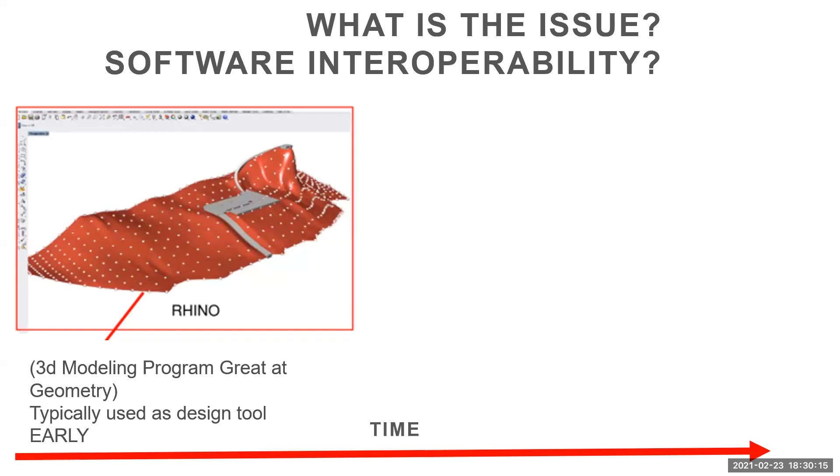Robert, yeah, okay. Angela, I hear you. If you want to shout out, say something, and I'll give you a shout out. Okay, very good. But what's the problem with that?

What do we typically document with? We typically document with Revit, right? Why? Well, it's a great BIM software, good for 3D coordination, good for documentation, right?

But that tends to happen later. So early on, you get these 3D models that you build in Rhinoceros, and later on, you have to be able to document the thing. It's not done in the same software - Rhinoceros is done by McNeel, and Revit is done by Autodesk. So what's the problem? We got to get from one spot to another. I mean, of course you can go back and forth, but that's the problem we're plagued with in our industry.

Does anyone have an issue with this, or has everyone already solved this problem? Let's see if there's any issues. Any headaches? Or has everyone got this solved? Yes? No? No one, not solved. Okay, Jeremy - migraine. Nearly everyone has an issue with it. Okay Bob, very good, so Bob's talking for the whole group.

Awesome, okay, so it's 2021 - why is this still a problem? Okay, I'm just laying the groundwork. We're going somewhere with this, okay everybody?

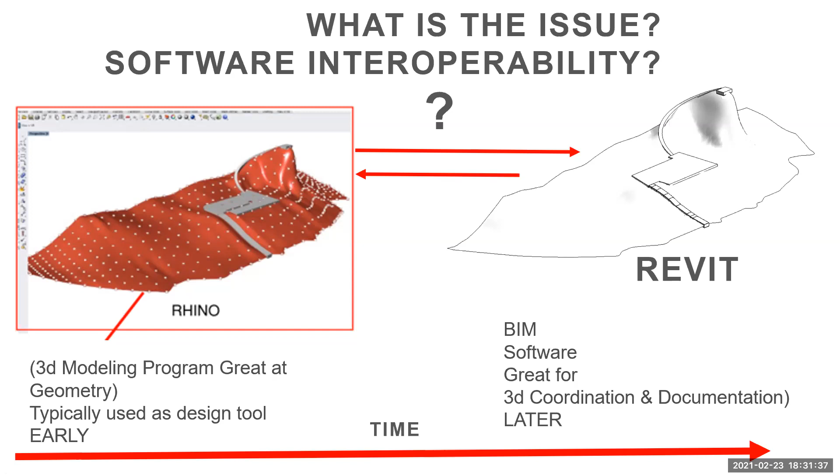All right, so what have we had to do in the past? It's sad, it really is, but this is what happens. We have to sometimes remodel from scratch, because we can't just go into Revit and say add Rhino and everything's perfect. We just don't have that - it's also not done in the same software.

Nate, okay good, there are add-ins - I'll get to that. Those are imports, but does anyone model from scratch? Come on now, I know you're out there. No one? Okay, maybe so. I do, I'll admit it. Okay, what else do you need to do?

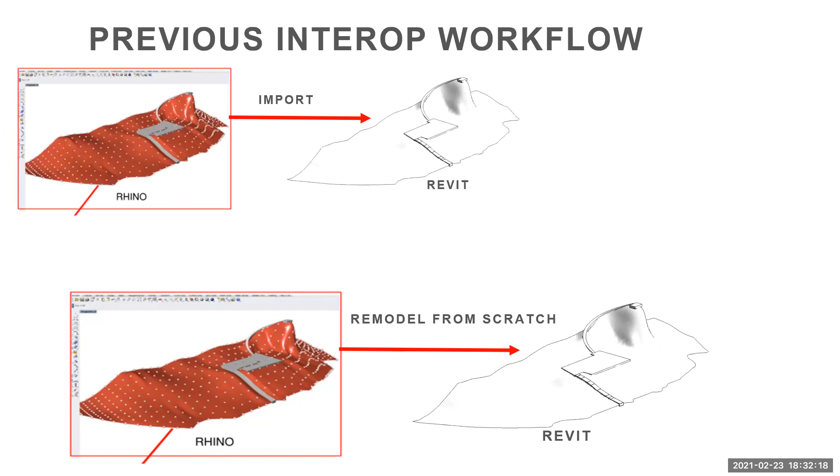Import, I saw CSV, okay that's one - pass it through another maybe database, or DWG import. The problem with this is it becomes unintelligent. Another one is there's add-ins out there that do this, depending on what software you're using - Conveyor by Nate Miller, there's also others, Mantis Shrimp, things like that. But these are all solutions that we're kind of using in our industry that aren't quite as seamless as we would like it.

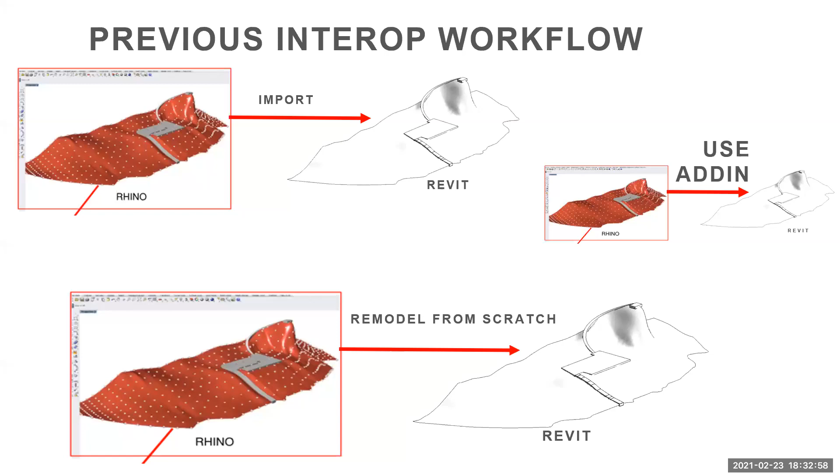So is everyone on board with me so far? These are kind of the issues - I'm just setting up what the problems are here in our industry. Any questions so far? Okay good, we're moving fast. This is awesome. So what do we do?

On board, nice Andre. What do we do? Well, there's a GIF now in our industry - can anyone guess what it is? Here, this is a hint. Someone guessed it earlier, Andre mentioned it too. Come on now, we got to get - this is virtual, but we get everyone involved. Come on now, anyone guess what this is?

Rhino Inside - that's right. This was a rhinoceros that I modeled inside of Revit. It's just, anyway, it's Rhino Inside. Okay, what does that really mean? What does Rhino Inside really mean? There's a lot of talks out there on Rhino Inside - I've probably easily done at least 10 of them over the last year on Rhino Inside.

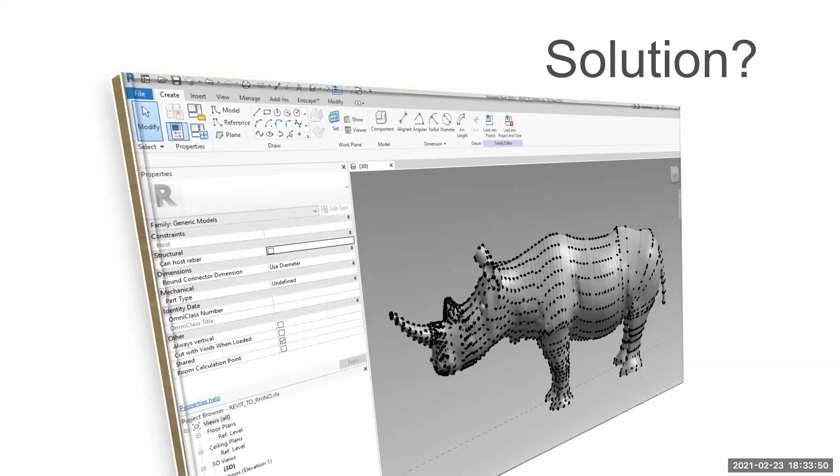We're going to take a slight spin on it, but this is one technology that can help you solve your problems. Why is that? The McNeel folks, the ones who make Rhinoceros - I tend to call Rhino Rhinoceros because when I say Rhino and Revit and keep saying them back and forth, sometimes I start switching them because they're one syllable words with an R. So I'm going to try to call Rhino Rhinoceros just for everyone, so you know.

The McNeel folks said, okay, why don't we do this - why don't we take the entire Rhino program and all of the things that come with it, including Grasshopper, and we'll just shove it inside of Revit. And what does that mean by shove it inside of it? That means we'll actually make it an add-in, okay? So now that's what's happening.

So we have this new tech called Rhino Inside Revit. And it's exactly that—Rhinoceros inside Revit. It is now an add-in, an elaborate add-in, probably one of the most elaborate add-ins I could think of out there. But it's basically an add-in, okay? And what that allows you to do is start to solve some of these interoperability issues.

Don't worry, I'll keep an eye on the time. Andre, we can go till the hour. I get about 30 more minutes or so. Go, keep going. Okay.

Okay, so let's look at this, right? Rhino inside Revit—now we have Rhinoceros and Grasshopper running inside of Revit. So what does that mean? That means now if we have a Rhinoceros model, and we'll bring this one up a little bit later...

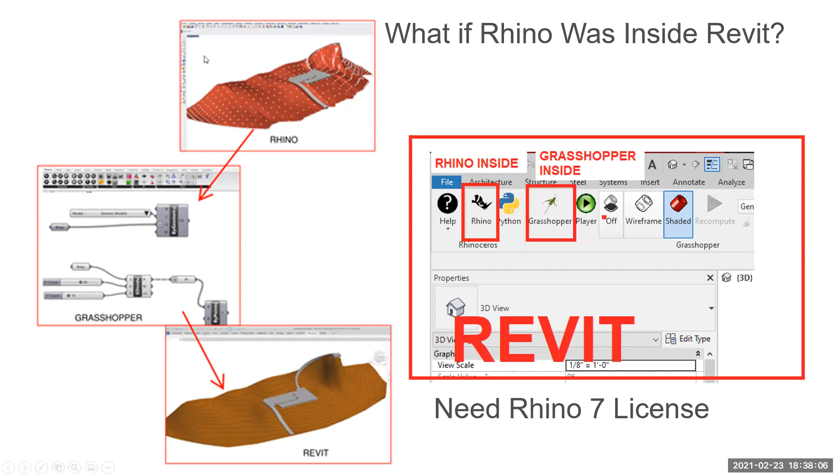Is it always topography that is imported? Good question, Peter. No, it is not always topography. In this example, it's topography with only six components that need to do it, but it could be a floor, a wall, structural framing, columns, or a road, perhaps. So the idea here is meaningful information—that's the point, right? Because before, a lot of times when we were doing imports, they were just meaningless information. If this came in as an SAT, that's only so good, but what if you need to tag it, document it, dimension to it? Meaningful stuff—let's keep thinking about that.

Good question, Peter. All right, so let me tell you also what Rhino Inside Revit is not. Is it the best thing since sliced bread? Yeah, absolutely. But let's just be realistic about it too, okay? So I showed you, this is Grasshopper. If you're not familiar with Grasshopper and you are familiar with Dynamo, it is a visual programming language as well, similar to Dynamo—I'm going to say similar to Dynamo, okay. But let me just show you what Rhino Inside Revit is not, okay?

This is looking inside of the Grasshopper environment. I want to tell everyone what it is not, okay? It takes a little bit of work. You can't just take Rhino geometry and stick it into a component. I called this the Rhino to Revit super component, where all your Revit geometry moves to the correct category, looks absolutely perfect on your Revit sheets, converts your document and your geometry perfectly every time, and then you have no RFIs, no change orders on the project.

This is not true, okay? I just want everyone to understand that. It's an easy button, but you need to make it that way. What I tend to do when I talk about new tech is everyone thinks it's gonna solve all their problems and they're never gonna need to do any work. That's not true, but this is definitely gonna solve your interoperability issues. It just takes a little work.

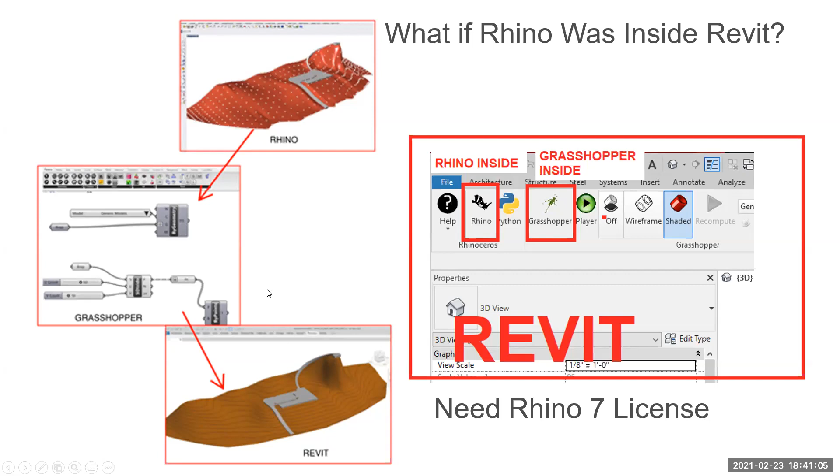Okay, good. All right, so now what? Let me show you—I don't have a lot of time to do live demos, and I normally do that, but let me just show you at least a little bit of something live. I just want to show you that when you use this technology, you need to be critically thinking, and then we'll get into a bunch of other things, including Dynamo.

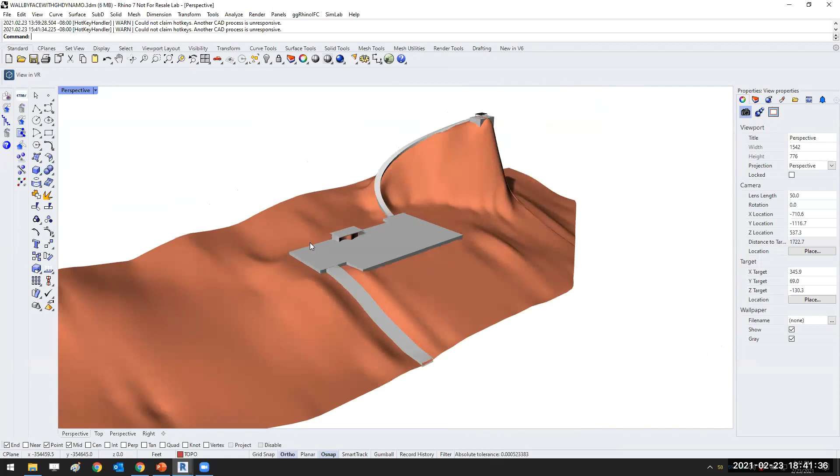Okay, so let's just look here. This is actually the Rhinoceros model that I had open earlier. If you are inside of Revit, there is a new tab here called Rhinoceros, if you have the Rhino Inside Revit plugin, and it gives you access to all this functionality. This one would be for opening the Rhinoceros model, and this one gives you access to Grasshopper. Now, I have Rhinoceros open right now—this is called Rhinoceros Inside, meaning it's open as an add-in through Revit.

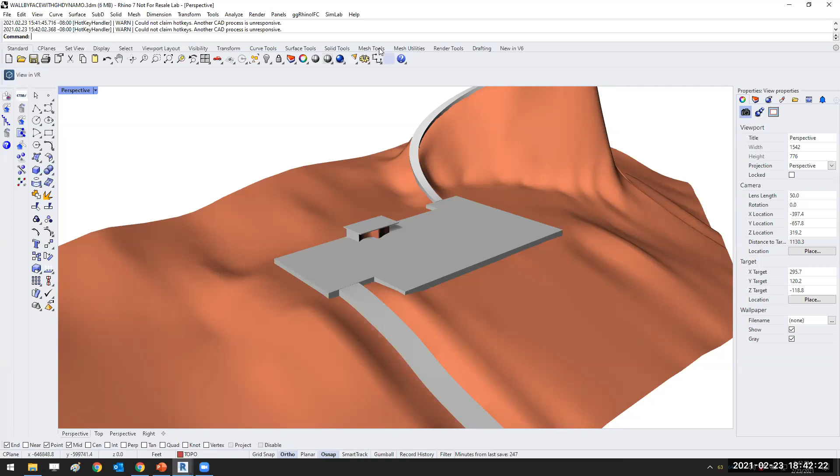If you can see my icons down on the bottom, you don't see a Rhinoceros icon—does everyone notice, maybe a head nod, no Rhinoceros icon down here? That's because it's running inside of Revit. So if I were to close Revit, it would close Rhinoceros Inside. It's running inside, it's an add-in.

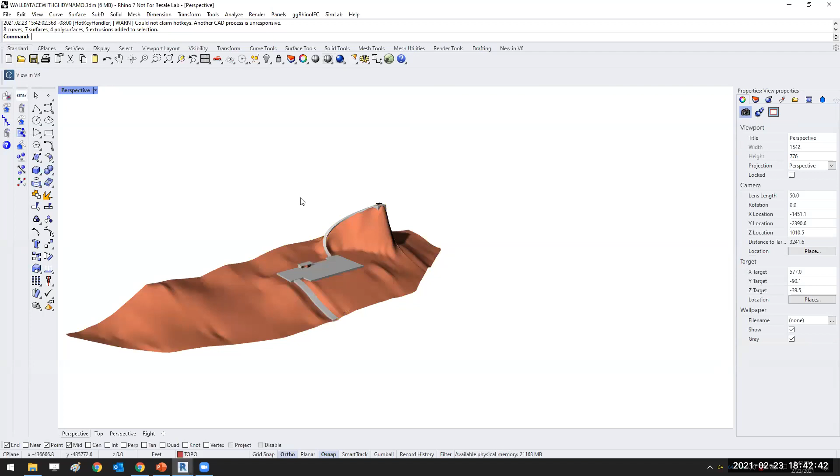Okay, so look at this particular model. This is probably very simple, but I'm sure you have more elaborate ones. Let's just talk in simple terms though. You wouldn't want to just take this whole thing and bring it into Revit—you need to make critical decisions as you move forward. This particular surface in Rhinoceros is a BREP, on a particular layer. What is this going to manifest itself as when I send it to Revit? Is it going to be a topography surface? Probably. Now what about this one—when I send this to Revit, what should it be?

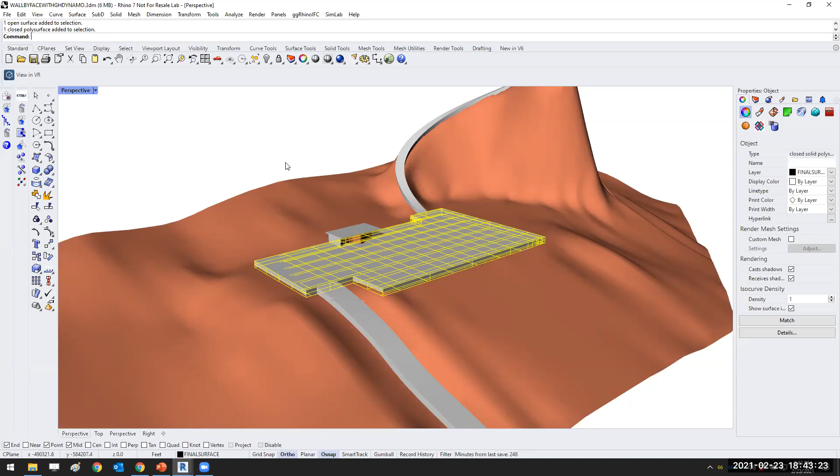Now, why are you asking yourself these questions? Because Revit doesn't know. If you send Rhinoceros elements to Revit, it's going to ask what category you want it to be in, what type you want it to be, because Revit asks these questions since it's a BIM software—it has meaningful information behind each entity. So if you're bringing elements from Rhinoceros into Revit, you need to ask these critical questions. So what would this be? Is this parking? Oh, probably a floor, maybe a building pad. Very good, Professor, yes. What about this? Maybe a ramp.

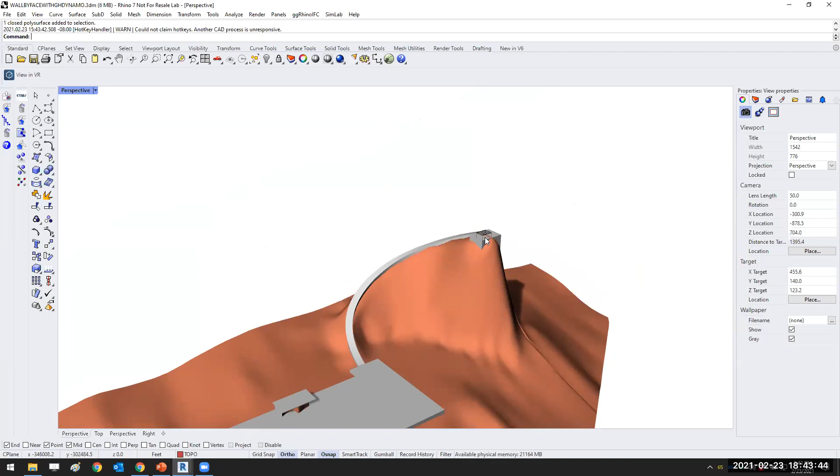What about these things? Anybody? What about those? Oh, we're a quiet group. Let's go. Okay, a column, let's say.

What about this? Maybe if that was like a restroom or something. What would that be? Anyone? This is roof. A roof, yes. You're like, this is easy. Good, I'm glad you think this is easy.

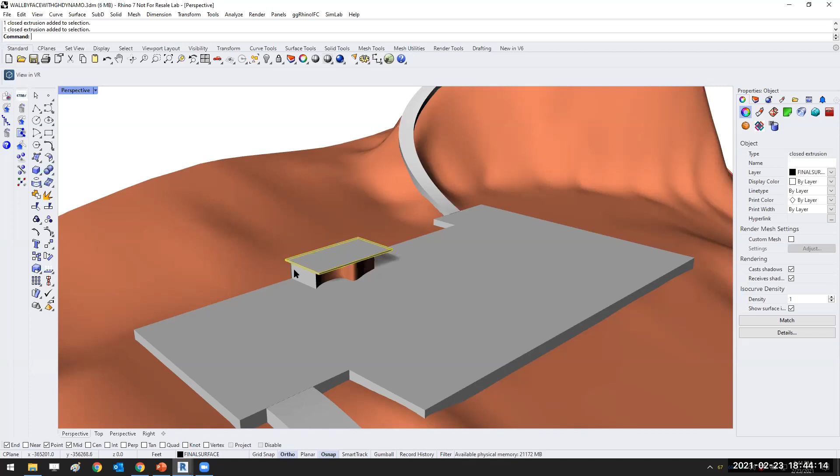What about that? A wall? What about that? Ooh, a curved wall. Nice. Okay, quiz time. What about this one?

What do you think? You think these are all slam dunks? Maybe, maybe not. What about this one? Anyone? Slide. Ooh, a slide. Who said a slide? We got some jokesters in here. Oh, that's awesome.

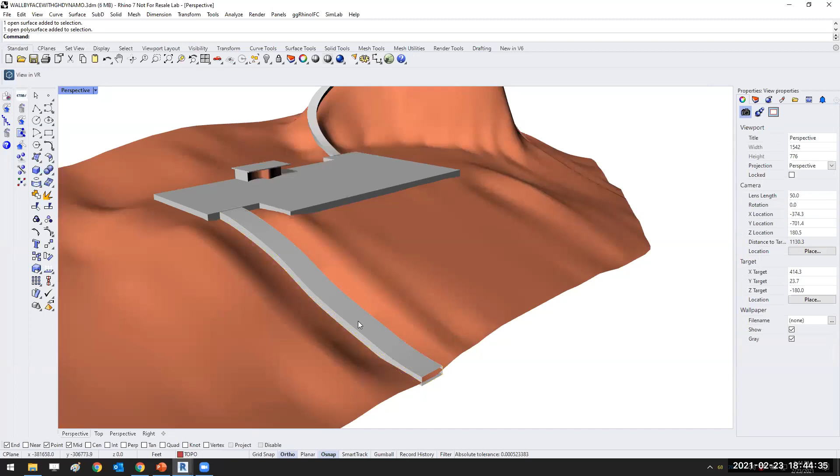Maybe a ramp? Maybe this is the ramp. What is this? Maybe a road? Anyone know there's a road category in Revit? There's actually a road category in Revit. You could bring this element in and give it a road category. Oh, you said road, Zach. I'm sorry, I missed you. Yeah, okay, very good.

So the point is you don't need to bring in everything, right? And you need to strategically think about that, right?

Can you purchase Revit with, oh, I got a question. Can you purchase Revit with Rhino? Holy smokes.

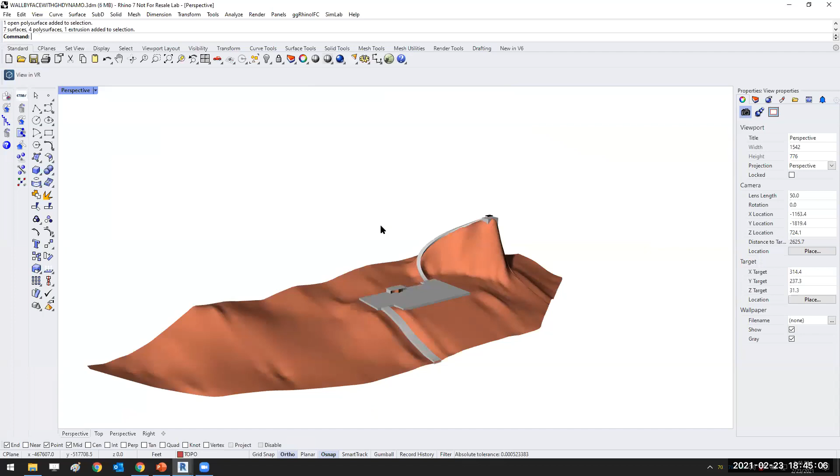Okay, this is coming up. Listen, everybody, this is how it works. If you want to get Rhino Inside Revit, you must own a license of Rhinoceros version 7, and you must own a license of Revit between version 2019 to 2021. And that's it. That should answer that question.

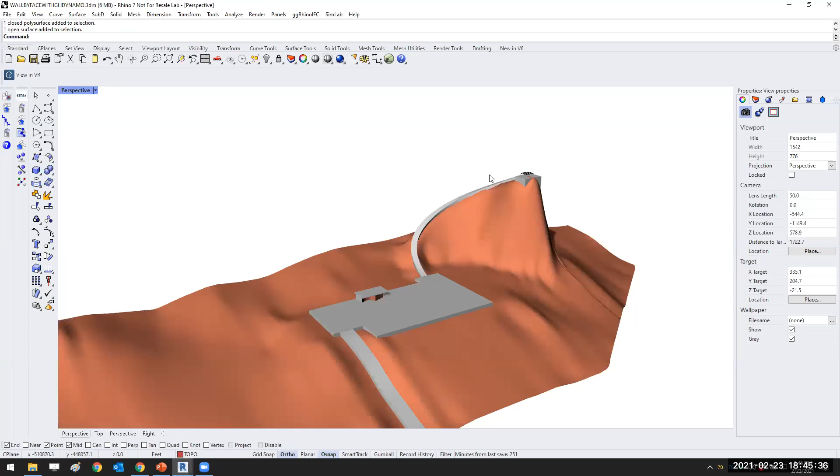Okay, all right, so anyway, you could just bring portions in. You could just bring the topography in if you want. You could just bring in the columns if you want, right? So the point is it's just not blind, bringing stuff in. Okay, I hammered that to death.

All right, let's move on. All right, so let's kind of look and see how this goes, and then we'll kind of get into some other things. Okay, so cool. Everyone on board with us? Andre, we got it on board, hopefully.

Critical decisions need to be made early. Okay, I'm going to talk to you really quick about how you bring elements in, okay? So here's our element again, here's our Rhinoceros model. There's kind of 4 ways to do it, and I'll go over this quickly so we can get on to other things.

Like I said, meaningful information, right? If you bring something into Revit and you can't dimension to it, you can't cut sections through it, then why bring it in? Well, maybe you want to do it for visualization, maybe you want to bring it to a game engine for visualizing. Okay, that's good, then you probably want to use this first method.

I call it the quick import, okay? You basically take the geometry, it brings it in as what we call a direct shape, okay? It just puts it on a generic category.

Next down from that is you can bring in quick geometry, but you can assign a category to it. So maybe the road you'd want to do this. It's just quick geometry, it comes on in there as a direct shape. And a direct shape is basically a generic geometry within Revit, it's kind of what it is. It's a relatively new thing inside of Revit, but you can assign a category to it, so you could assign the road category to it.

Okay, the next kind of level of bringing something in is you could actually take an element within Rhinoceros and you can build it inside of a family template that you choose. And then you can load that family template in. So maybe it's a door and you build it in the door family and then you bring that particular family in, or a wall—I mean, not a wall, I'm sorry—or maybe a structural beam, okay?

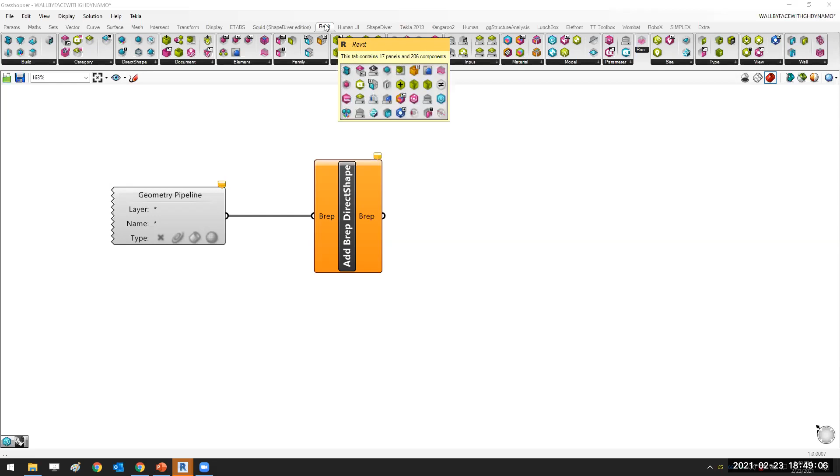And these things, if you go back to Revit, actually live in Grasshopper under this Revit tab. This is new kid on the block. If you have certain add-ins, it would show up right here as Revit, and there's over 200 components in there, one of them being create topography. So it's that simple, I like to call this plug and chug. Maybe you're not doing topography, I don't know, whatever, but let's go through some more examples.

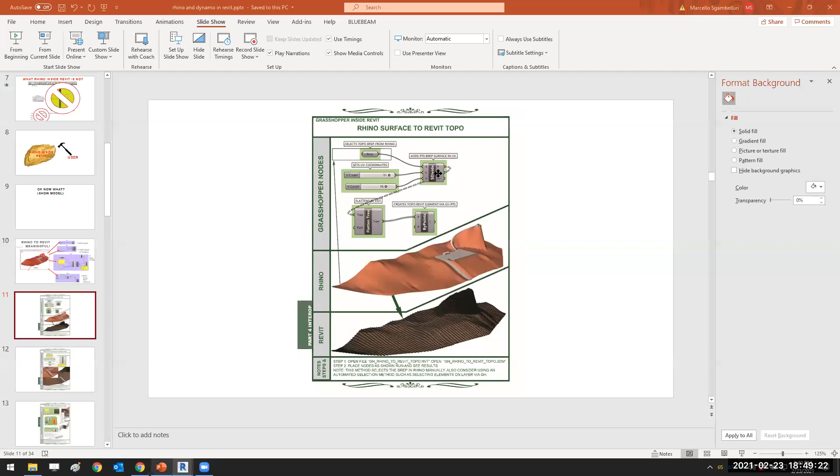Yeah, just good stuff. Got to get something, come on guys. You guys, where we at? Yes, a chat, a thumbs up?

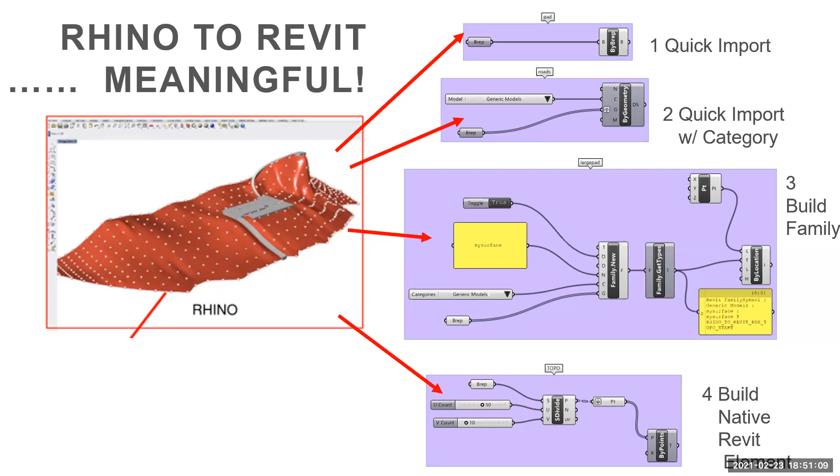Can you talk about trade-offs of direct shape? I certainly could talk about trade-offs of direct shape. It's going to be all up to you on what type of element you're going to float in here. Now, I personally tend to use direct shape a lot, and the reason is because I want to see it in Revit and make sure it works, it's geometrically correct. Sometimes I'll kick it out to Enscape or another game engine to view it. I'm not necessarily cutting sections through it or tagging it or dimensioning to it, so in that way direct shapes are very good. The reason I use direct shape in this road example that I'd carry through the project is because there's no road tool in Revit.

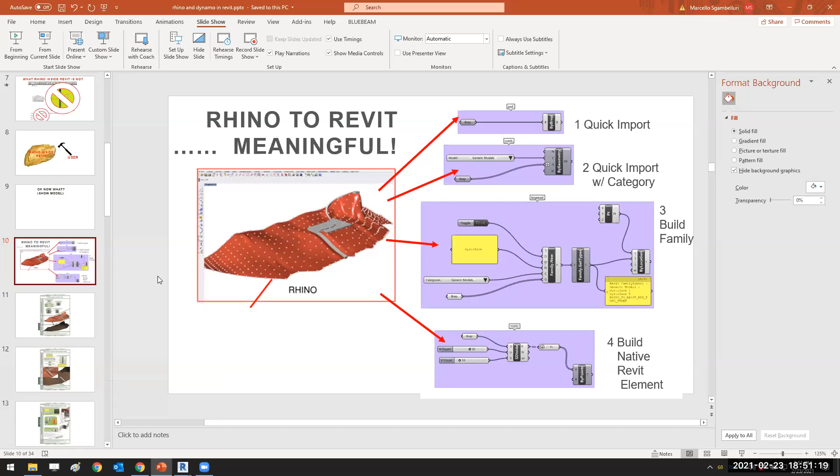Still shocked there's a road category. Yes, you should be very shocked, I was shocked when I saw it too. You're like, wait a minute, in Revit, where's the road tool? I don't see a road tool in Revit, where would it even be? Under massing and site? Anyone see a road tool in here to build a road? But there's a road category. Okay, very good, all right, good question.

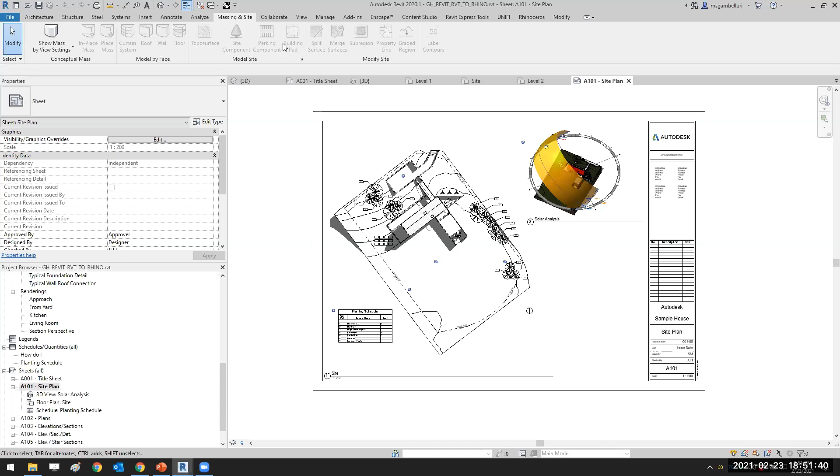All right, so let's head back. Direct shapes have pros and cons. I use direct shapes for roads because I can just give it the category, since I don't have a build road tool inside of Revit. That's why I tend to do it. I tend to use it early on for visualization, that sort of thing. Okay, we'll go over this one in a little bit, but I talked about this already.

What about using floors as a replacement for roads? Very good question. Now we're getting academic. Where's our professors? We want to have an academic discussion about that, right?

Should you use floors instead of roads? You have at it. I would let you explore if you want to use floor elements instead of roads. I actually did an entire class on that subject in 2013 at Autodesk University, and we went over the pros and cons of that. So please feel free to Google that, and it'll explain the pros and cons of doing that.

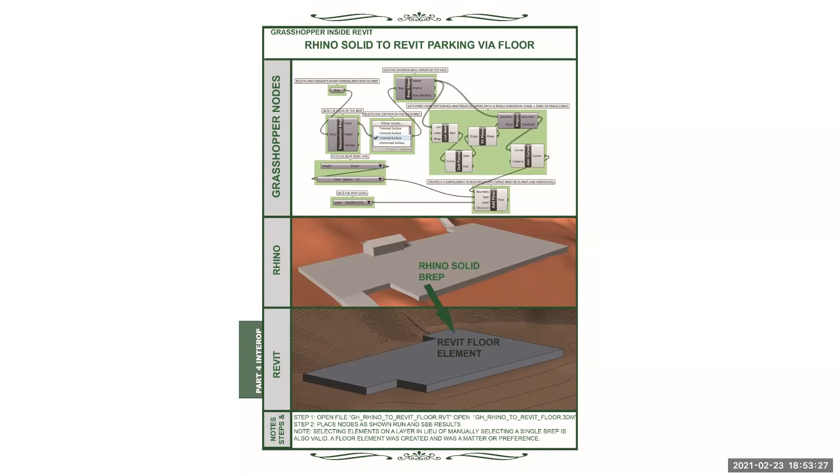So who is this, Armido? Yeah, you look into that. Maybe use a pad, sure. Or maybe use X, go for it. Okay, I'm showing you how to do a floor, but that's the idea.

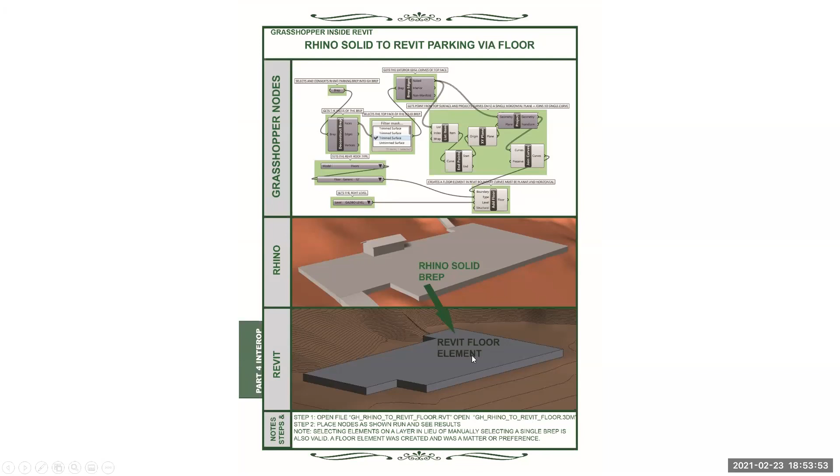You can think about this, right? And you can say, okay, well, I can replace this with something else because now I have the geometry from Rhinoceros. I can then put in Revit X element. Okay, that's the idea. And how will you know? You got to try it for yourself, right? I need to go back here. There it is, right? That's why.

You want to have discussions in your office? Go for it. Should we use a floor? Maybe, right? There it is for you. It's a piece of gold. You use it, it'll make your lives awesome. I tell you, use it correctly.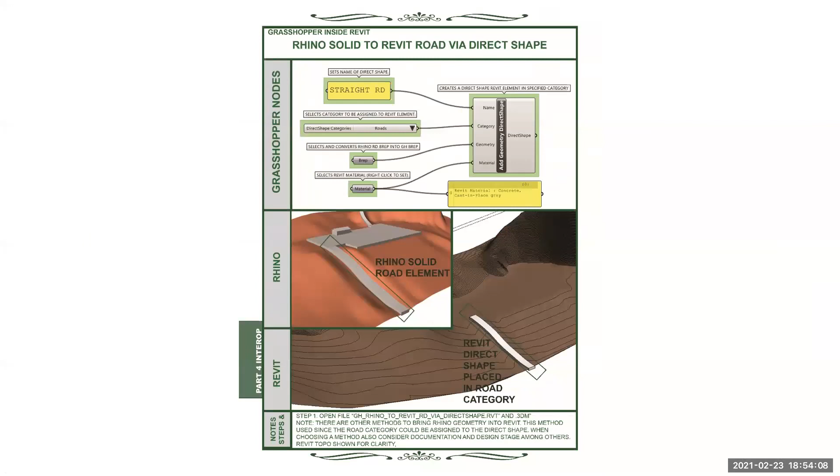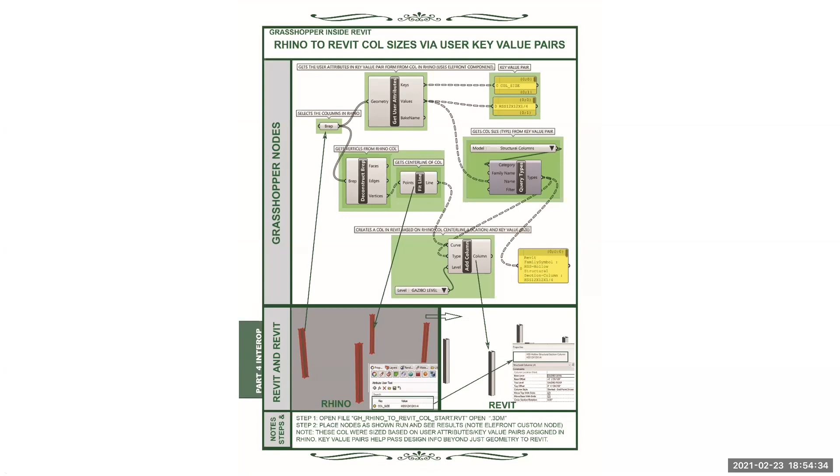Okay, here's another cool one. Let's talk about those columns that were up there. Someone said 2x4, but these are columns, right? In Rhinoceros, we have columns, right? I'll show you what's even super cool now. I don't know if anyone can see it, but Rhinoceros actually does have information where you can embed information inside of objects. They're called key value pairs. They're kind of hidden, but they're super neat.

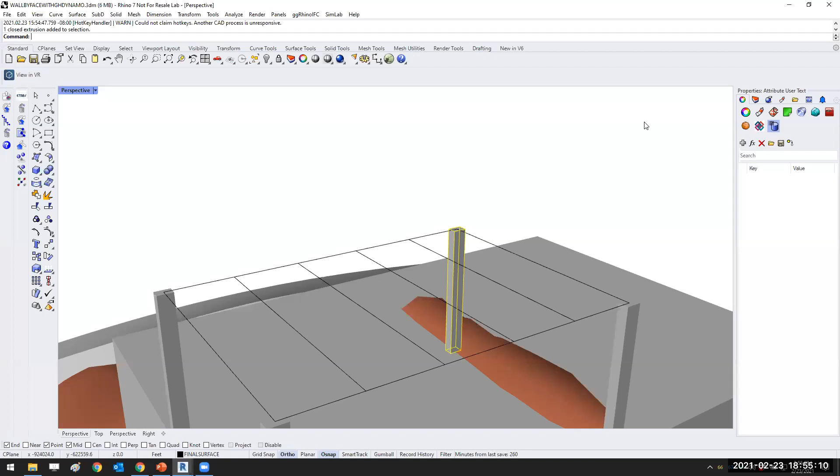If you were to go to Rhinoceros, let me see if I can find it. There's Rhinoceros. Okay, every element, you have the ability to embed information inside of it in the user attributes, which are here. So user attributes can have what we call key value pairs. You could enter in here like structural column and then give it the size. That's what I did in this particular example. Now, Rhino Inside Revit can pull that information out of Rhinoceros, and not only will you get the geometry, but you can actually pull over smart information, like I'm showing here.

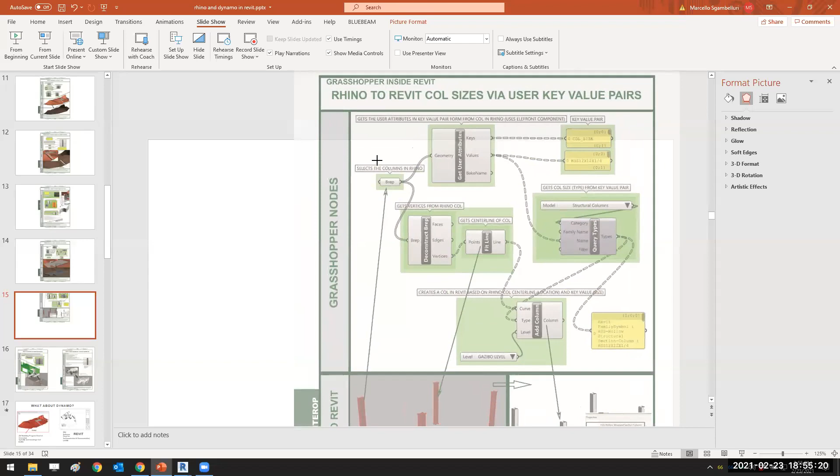I don't know if there's a way to zoom into this. We'll just hack it, Bob. Okay, we'll just hack it. Then what you can do is embed that information inside of Rhinoceros. Then when Grasshopper reads that information, it pulls the geometry, pulls the center lines, and pulls the key value pair. And then it can tell Revit, hey, build that column, but not only that, use that type and assign it. Boom. So it's another dimension you can give to the interoperability here.

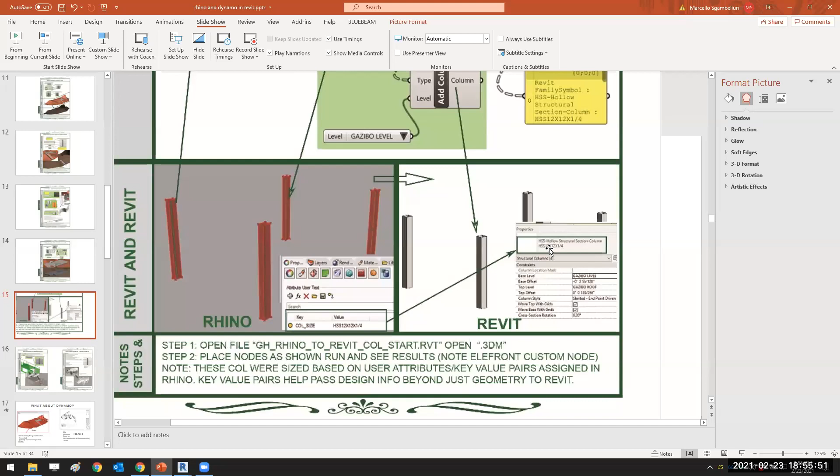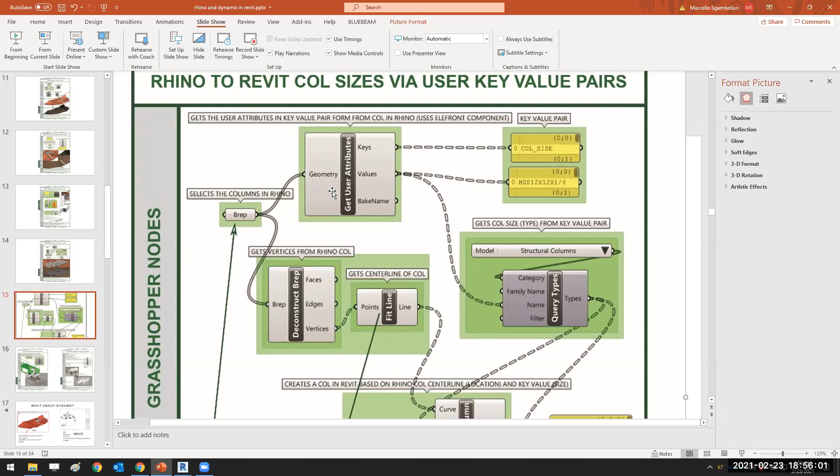So it's something you can think about. They're called key value pairs. There's a good add-in that uses it called Elefront. They allow you to put in key value pairs kind of parametrically through Grasshopper, or you could just enter them in manually, however you want to do it.

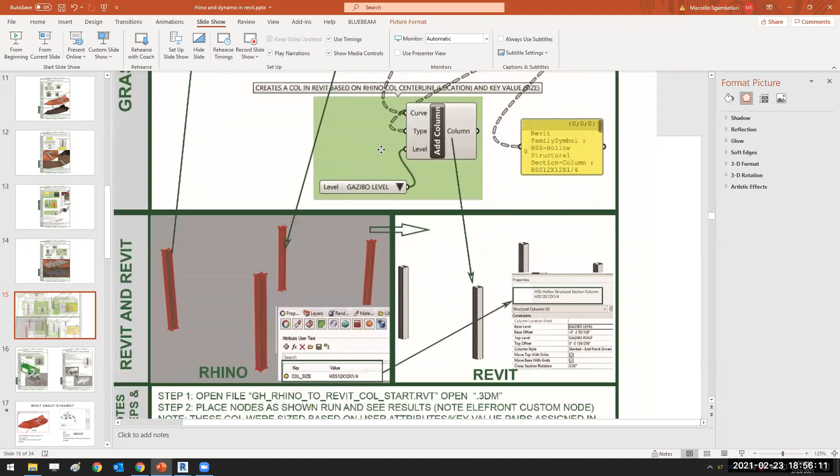Does that mean the value needs to match the type name? That was a very good question. It doesn't have to, but it certainly could. You could just say 12 by 12, and then you could set up filters to be able to do a lookup and then assign it. So that's not necessarily true. It doesn't necessarily have to match exactly, but it is the easiest thing to do to match it exactly.

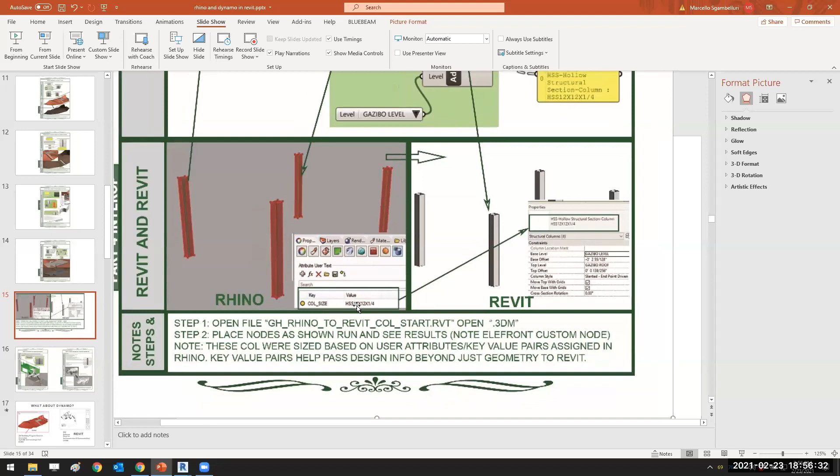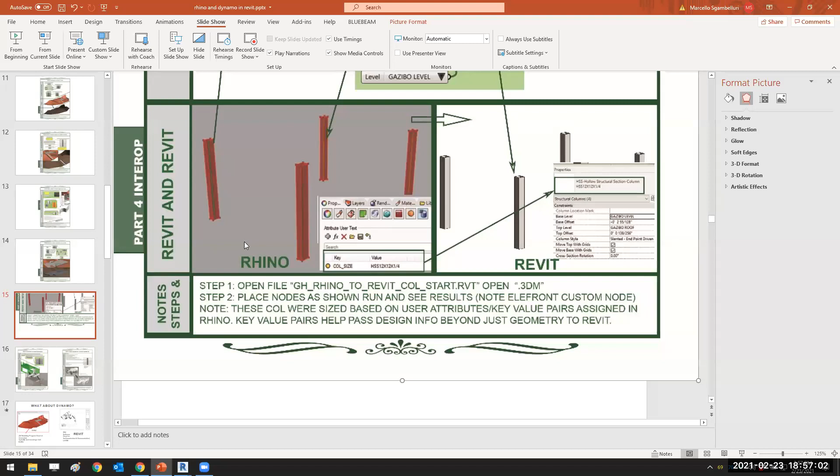Now, I guess the question is, how will the Rhino user know to put that in? How will the Revit user know to use that? We'll go over that in a little bit. I can tell you one way to do it. Virtually, or if you're in the office, the Revit user could stand up, walk over to the Rhinoceros user and tell them. That's one way to do it. We'll get into other ways to do it. Okay, everyone cool with this?

So I've been kind of focusing on going one way, but you certainly could go the other. You could go from Revit to Rhinoceros. Here's some very good examples. One is, I use this all the time. I go from Revit to Rhinoceros a lot of times. Why? Because a lot of times I'll be building stairs, and I like the way Revit builds stairs better than Rhinoceros builds stairs. Just gonna say that. So what I do is I'll build these stairs inside of Revit, then I'll pass the geometry to Rhinoceros. I'll continue building my Rhinoceros geometry around my stairs, and then kind of back and forth.

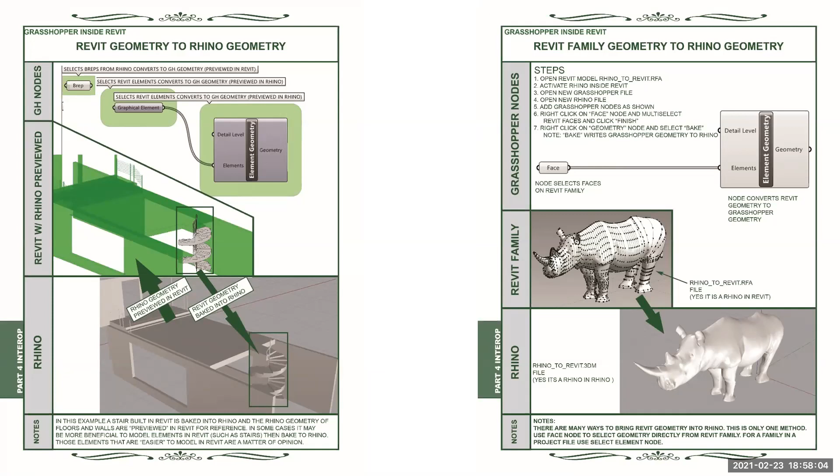So in this particular example, this particular stair is built inside of Revit and then brought into the Rhinoceros environment. And then these particular walls and floor were built inside of Rhinoceros. So you can start mixing and matching and have yourself a good time. I've never had any problems with geometry conversion going from Revit to Rhinoceros.

Here's a case in point. This right here is the Rhinoceros inside of Revit. And then this is the Rhinoceros inside of Rhinoceros. So there's the conversion right there. So it seems to work pretty well.

Are there any questions about that before we move on? Are we doing on time? Oh, we're doing awesome on time. Okay, so any questions about that?

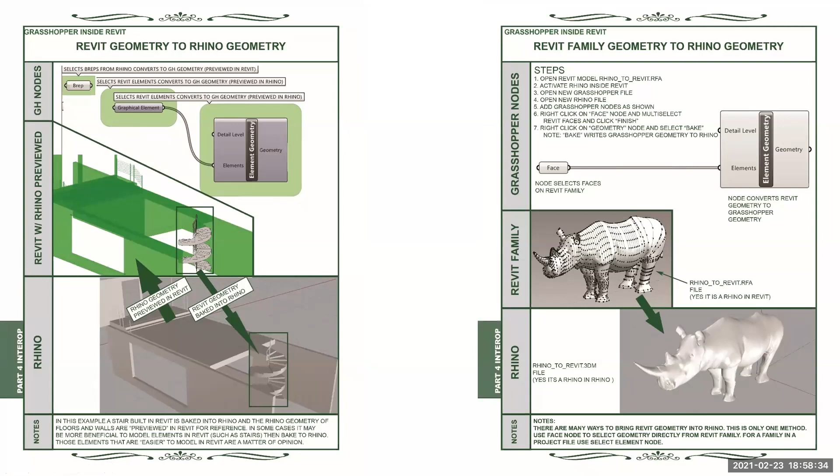That's kind of the Rhino Inside Revit technology. But the name of this class is Grasshopper and Dynamo. So what about Dynamo? This is kind of the new thing that I've been talking about. Everything I've showed you, you really could Google online and find the ins and outs of Rhino Inside Revit. What I want to do is get everyone kind of thinking critically about what are the tools you have. And one is Dynamo. Let's talk again about the advantages of Rhinoceros and Revit.

Rhinoceros is an excellent 3D modeling program. Revit, in my opinion, is very good at documenting and 3D coordination. Okay, so we keep that in mind. Well, what does that mean? Dynamo has been around a long time interacting with Revit. So what Rhinoceros and Grasshopper are great at, and Rhino Inside, is really good at 3D geometry. But there's a lot of components that don't exist for documentation and so on.

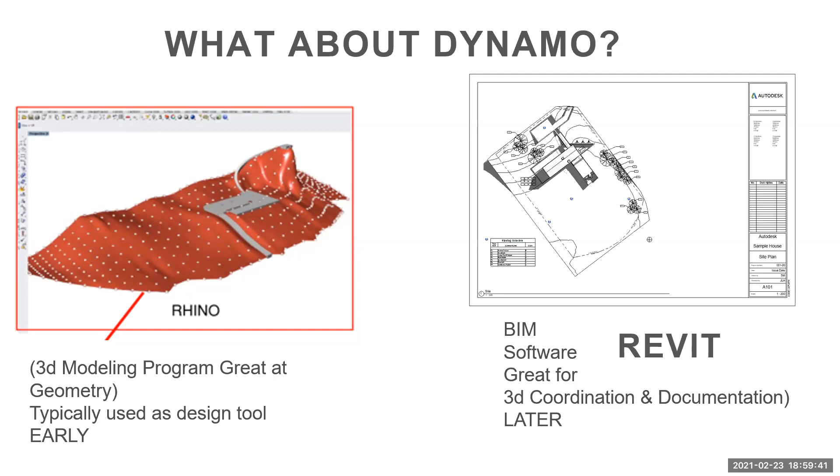Do you remember that tab I showed you? I'll show you it a little later. But Dynamo is very good at that—2D elements, dimensions, text. So if you think about how these two can work together, think about their strengths. And then here's Dynamo on the right, changing text notes to uppercase. Very good to do that.

Maybe you're a structural engineer and you have a bunch of generic notes, or a bunch of text notes across your entire project, and you need to kick them all to uppercase. These nodes right here, if you're not familiar with Dynamo, will do that.

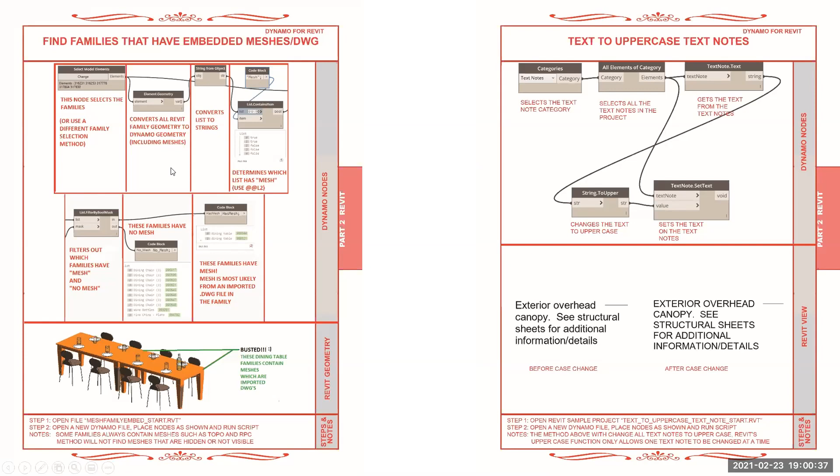If you're not familiar with Dynamo, Dynamo is a visual programming language as well. It comes with Revit. It's basically boxes and wires. But with these 5 nodes, you can change all your text notes to uppercase, if you want to do that. It does other things. It talks with the Revit database really well, because it's been doing it for 8 years.

So if we can think about that, also a lot of companies—and maybe we can give like a smiley face or a thumbs up—how many of you use Dynamo in your office right now to interact with Revit in some way?

Anyone load me up here? Yeah, Peter. Yeah, okay, so what I'm saying, yeah, I wish. Okay, good, at least a little bit, right?

And you've probably already created workflows for it, right? So I'm not saying toss it all out the window. I'm not saying that, think about how they could be worked together. I will help guide you to think about how you can do that. Is the idea to complement Dynamo with Rhino Inside? Yes, that's right, Professor. Professor Ari likes to jump right to the conclusion. You got to let me give my little song and dance here, but yes, that's where we're going. Absolutely, totally, it's totally where we're going.

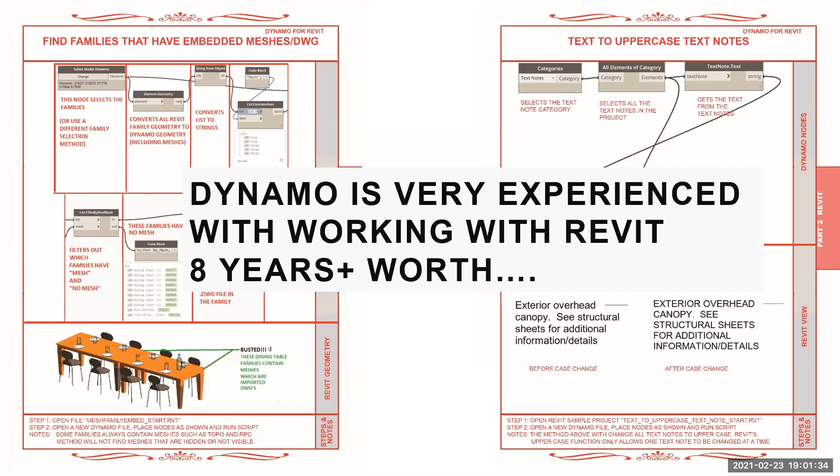Okay, so think about their strengths. Now think about this. Okay, Grasshopper, I showed you the Revit tab inside of Grasshopper. There are about 206 components right now. One of them would be, any guesses? I just went over them. Can anyone tell me what one of these 206 are based on what I showed you? Tell me one of them. I showed you a few already, right?

Topography, yes, add topography. Give me one more because I know you were listening. Give me one more of the 206. Floors, yes, add floor, Nick. Okay, very good, okay, so that's 204 to go. All right, who's next? No, I'm just kidding, we're not gonna do all 200.

The point is there's 206, which is not a whole lot. They all focus around geometry. Okay, just take my word for it for the most part. Dynamo, there are thousands and thousands of components, right? Thousands, if you include all the packages out there. I mean, I have a package in Dynamo right now called Simplex, that has 1,600 nodes alone, okay?

So there's a lot, right? So let's think about how we could have them complement each other. All right, so if you have 206 here, there's probably something that you don't have as you're starting to look at this technology, okay? So one option, and I didn't mention this earlier, is you can create your own custom component if it does not exist with Rhino Inside Revit. So one example is this, okay?

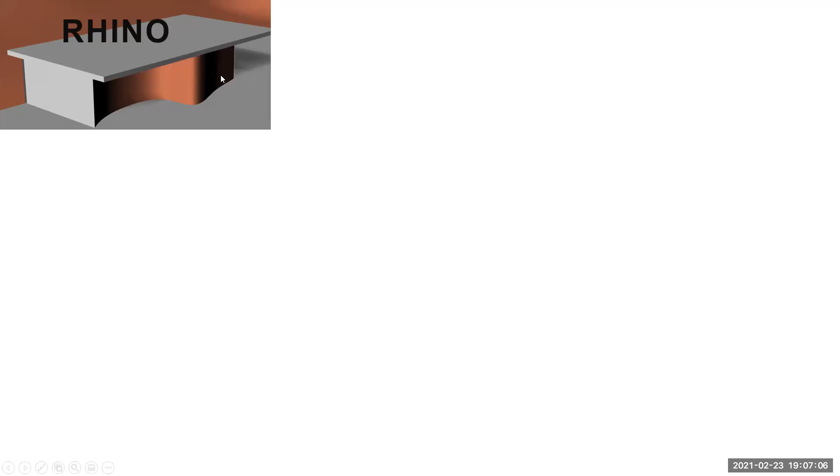We could look to Dynamo to help us, and I've done this already. Say we have a Rhinoceros model with a curved wall. You can use Grasshopper to take that surface, prep it in Rhinoceros, and pass it to this component called 'new component family.' You assign a category, and I used mass, though you could use adaptive component or whatever. It builds a new family and sticks that BREP surface into the mass family template. Now it's a mass family holding that BREP surface. Then you use 'add component,' and it places that family inside of Revit. That's all Grasshopper out of the box. Now your mass surface is inside of Revit, placed via Rhino Inside Revit.

Everyone follow me so far? That's one thing you can do to start. Now at this point you say, I'm gonna use wall by face. Remember how we had add topography, add floor? There is no add wall by face. Maybe they'll add one, but there's not one right now. So what do you think we could do?

We could use our friend Dynamo. So we've got Grasshopper on this side and Dynamo on this side. Dynamo has got wall by face, it's had it for a while. You take that surface, it grabs the surface, however you select it, even programmatically, not just a manual select. And boom, it adds it on.

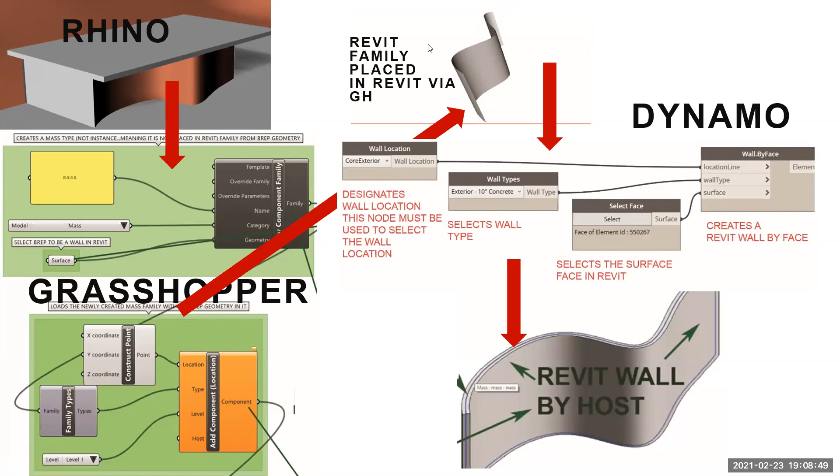So what are we doing here? Basically, where you can reimagine how to have these two work together is you think about Rhinoceros and all its strengths, you've got Revit in the middle, and you've got Dynamo over here. They can work together to fill the voids that one or the other may not have.

Is the mass within the mass family template enabled within Revit via SAT geometry? That's a good in-depth question, Ian, let's chat later on that one, it requires a bit more explanation. Maybe we'll chat later or you can email me about how it manifests itself inside the family. The point is it's in the family, and you have a lot of freedom when it's inside a family template.

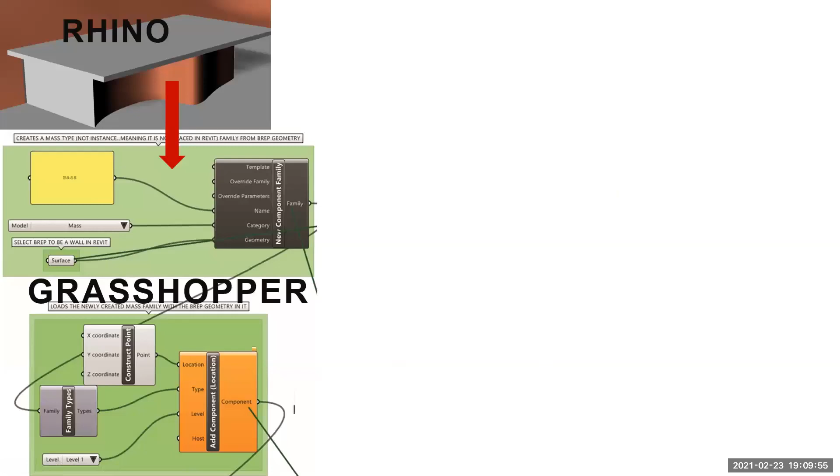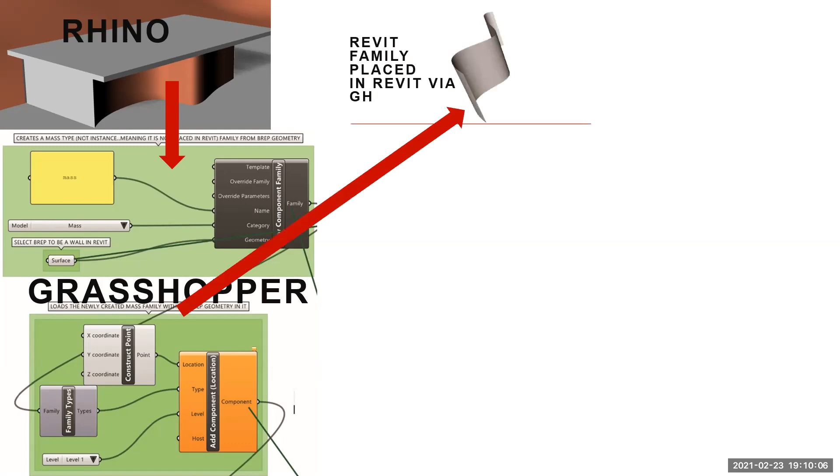I tend to use this method, by the way. I use this new component family approach to bring geometry over when the components are small inside, and when the geometry is small within Rhinoceros, like a bench or maybe a Corinthian column, something like that. I'll put it inside a family template and then stick it into Revit, typically. Okay, so then that's it. Finally, here we go.

Not only can we talk about the software working together, we need to talk about the users working together. Okay, now I need a little survey here.

How many people have separate users? It could be the same person. How many typically have separate users that do Rhinoceros versus Revit? You have kind of dedicated teams - this is the design team, this is the documentation production team. Anybody? Maybe, separate, okay for sure. Yes, yes, yes, 80%. There's hybrids, of course, right?

Separate, solve, wall by curve, good, another wall by curve. I need to simplify a spline, wall by curve questions. Ooh, I love it. Okay professor, email me, we'll talk later about that.

Often separate users. Is everyone on board with this? You will not be able to make this tech work unless you get the users to work together. And how do you get them to work together? The same thing - you look at their strengths, you look at their weaknesses.

Everyone see that last one? I know I'm running out of time, so I gotta speed through this. It's attitude, right? So you gotta make sure they're proactively working together. If I had more time I'd go through this - I had this little comic strip thing, but anyway, everyone get the idea.

This is a common thing in our industry. Even in structural engineering, you tend to have structural engineers with their own analytical models and software, and then you have the BIM production team, who tends not to be traditionally engineers. So this is kind of a common theme where not only does the software need to work together, you need the individuals to work together. Just think about that as you move forward.

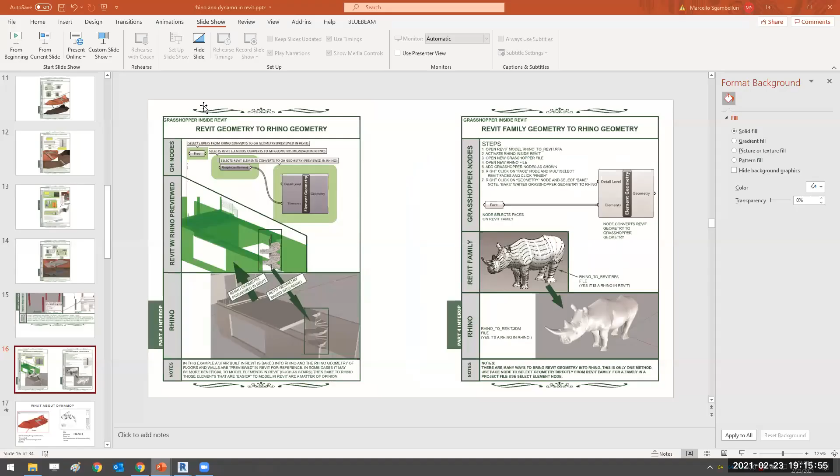Thank you. Someone's asking for a promo code. Unfortunately, I can't do that.

All right, Robert, I'll turn it over to you, but thank you everybody for listening to this cutting edge, Dynamo Grasshopper work together. Remember, it's about the tech, it's about the humans involved, it's about the attitude. It kind of all comes together. So it's important. All right, very good.

Thank you, everybody. Thank you, Bob, and thank you. So that was amazing. I was hoping that you were going to say the promo code was unconditional love, but it's totally fine that you can't get one out.

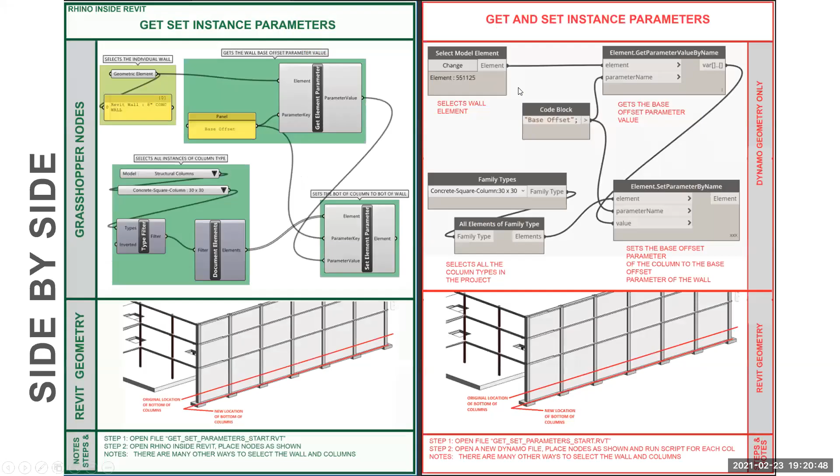Can Rhino Inside Revit and Dynamo run simultaneously? That's a good question. You could have a Revit model open, have Dynamo attached to that model, and have Rhino Inside Revit attached to that same model. I kind of alluded to that in this graphic, I tried to summarize it here, but basically you can have them both open and working at the same time.

A question was about passing element IDs. Sure, if you want to pass element IDs, you could do that. Absolutely.

Questions on Speckle, this is the conversation here. I'm focusing on Rhino Inside Revit and Dynamo, that's where this whole talk is. So Speckle is a bit off topic because we're talking about interoperability between these two softwares. This is the workflow I'd recommend you consider, the one on the screen. If you want to pass information to other places and back using Speckle or some other type of software, I don't discourage that at all. I'm just saying if you want to think about this workflow, this is how you can be successful at it.

MicroStation, is that a question? I see MicroStation in all caps. Oh wait, no, I don't know where to go with that one, Peter. MicroStation obsolete, you want to have more theoretical discussions? You know what we need to do, Bob and Andres? We need to bring everybody back and all the academia, and let's have an academic discussion about some of these topics, because I think that's kind of where they flow.